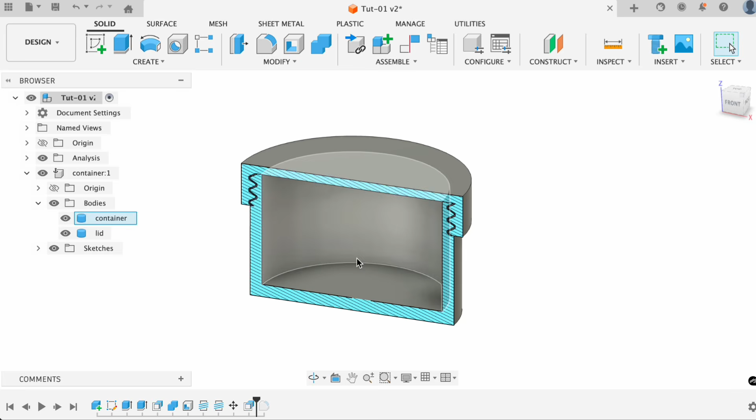Hey guys! In this video, I'll show you a quick hack to optimize threads in Fusion 360, achieving a 45-degree profile to eliminate overhang issues. In our last video, we built this container in 10 steps, using extrude, combine, and shell to build the raw container and lid. Then we added standard threads and used offset face for the clearance.

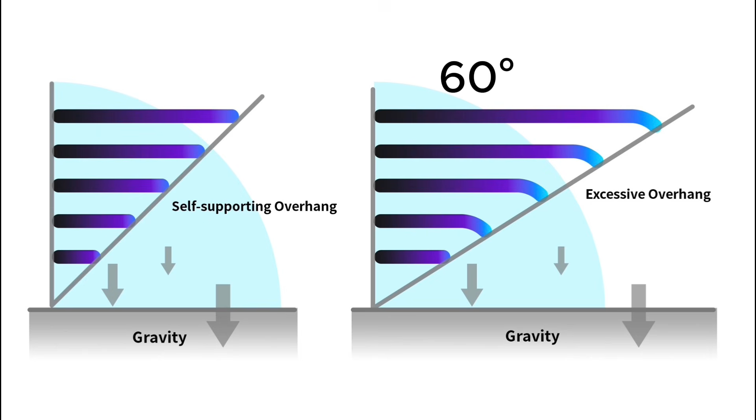However, standard threads in Fusion 360 have a 60-degree profile. This 60-degree overhang is not good enough for 3D printing and can cause sagging. Today, we'll optimize that angle to 45 degrees in a few steps. Let's start from the model we built in the previous video.

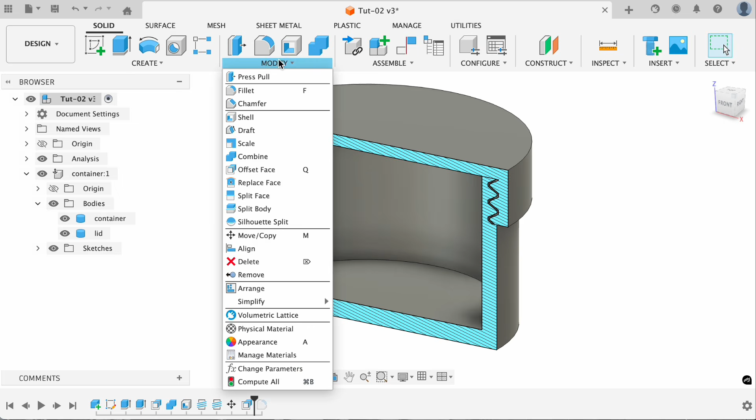First, go back in the timeline to before the fillets. Click Split Body. Select the container as the target and use the plane under the lid as the splitting tool, so we can modify the thread area separately. Use the Scale tool under Modify. Select the lid and the threaded section.

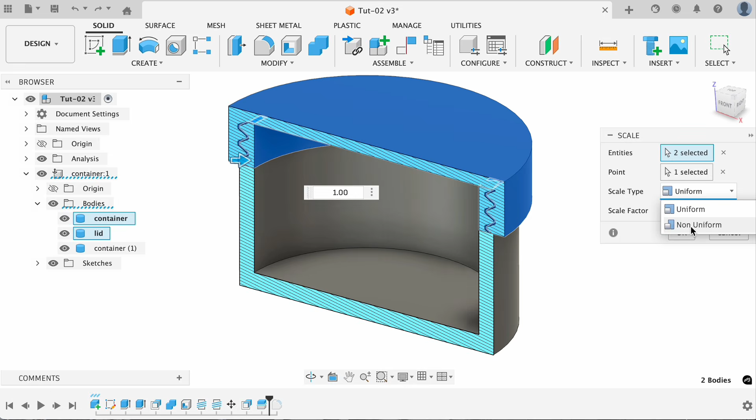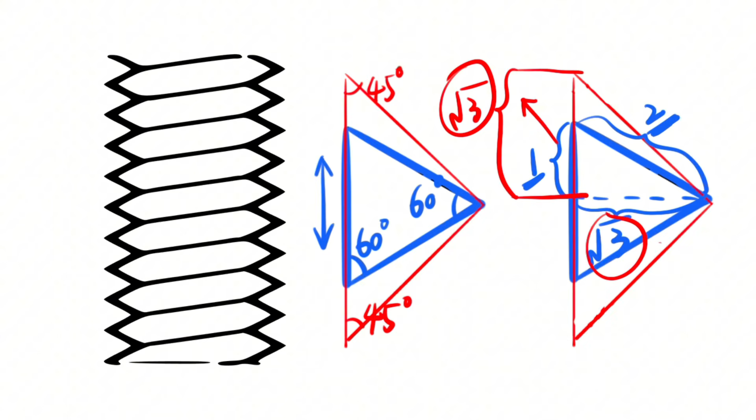Set the scale type to non-uniform, as we only want to change the profile height without affecting the other two axes. For the z-axis, enter the square root of 3. If you wonder why the square root of 3, here's a little math for you. Now, look at the profile. The overhang has been reduced to 45 degrees.

Next, click Combine in the Modify panel. Select the threaded section as the target and the base as the tool. Set it to Join, and make sure Keep Tools is unchecked, as we no longer need the separate lower part.

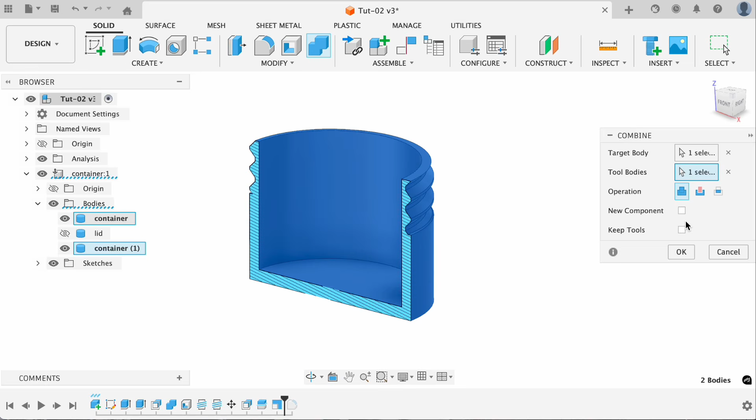Now look at the cross-section. The pitch has increased due to the scaling. The original 3mm pitch is now roughly 5.2, which looks a bit too chunky. If we start with a 2mm pitch, it becomes 3.4, which is much better.

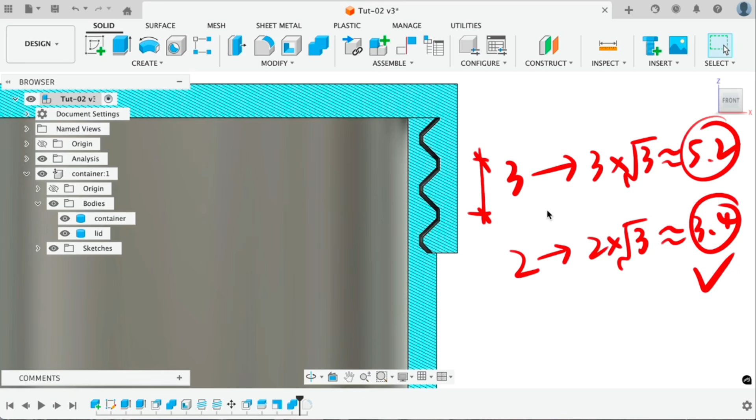Let's edit the thread command in the timeline. Change M50x3 to M50x2. This keeps the final pitch close to 3. Don't forget to update the lid thread as well.

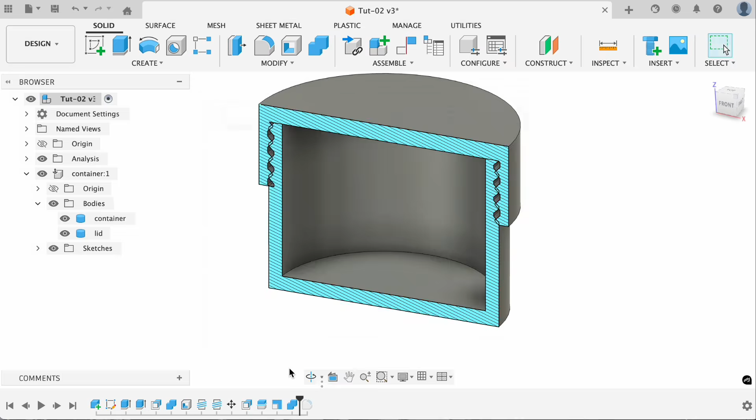To make sure the lid secures fully within just 1.5 turns, let's go to Modify, Change Parameters. We'll update the thread variable to 3. This is calculated by multiplying the 2mm pitch by 1.5, representing the 1.5 turns we just mentioned. Now, the pitch modification is complete.

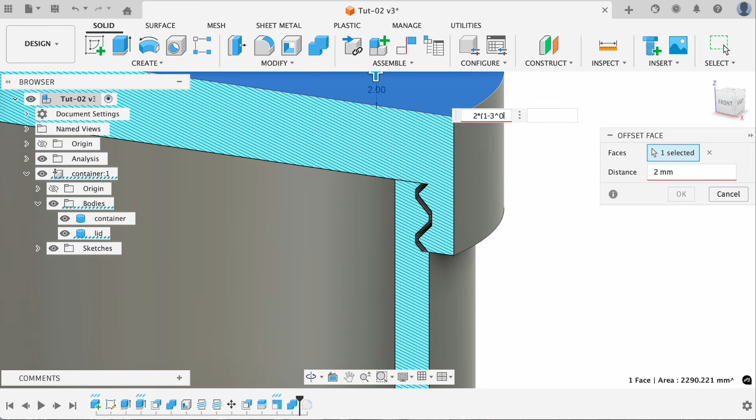I've noticed the scaling also thickened the lid. If you want to change it back to 2mm, click Offset Face. Select the top face of the lid and enter 2 times (1 minus square root of 3). Now the thickness is back to 2mm. Finally, reapply the fillets. All done.